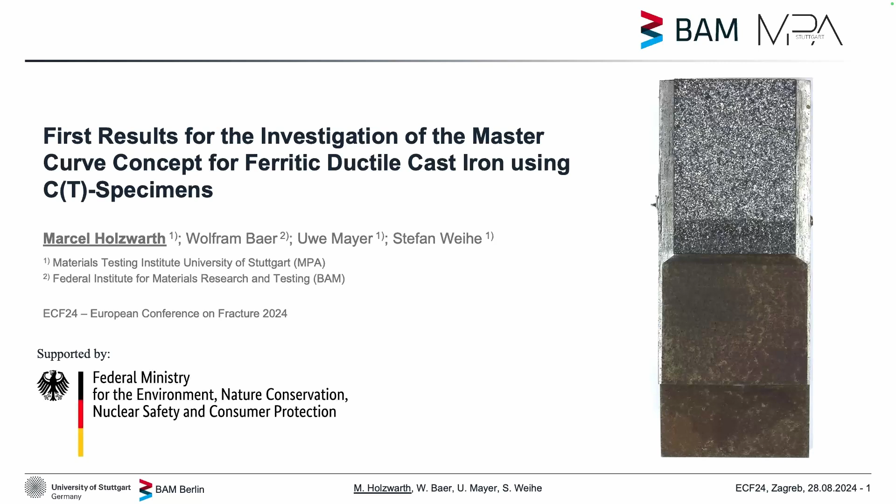Why are we doing all of this? If we check the regulations, for example, IAEA SSG-26, for their approval, we need a proof that no crack initiation at all happens above a specified temperature, for example, at -40 degrees C. And for nuclear transport and storage containers, this is at the moment done via high effort and very expensive drop tests. We see two examples here. And those are made from ductile cast iron.

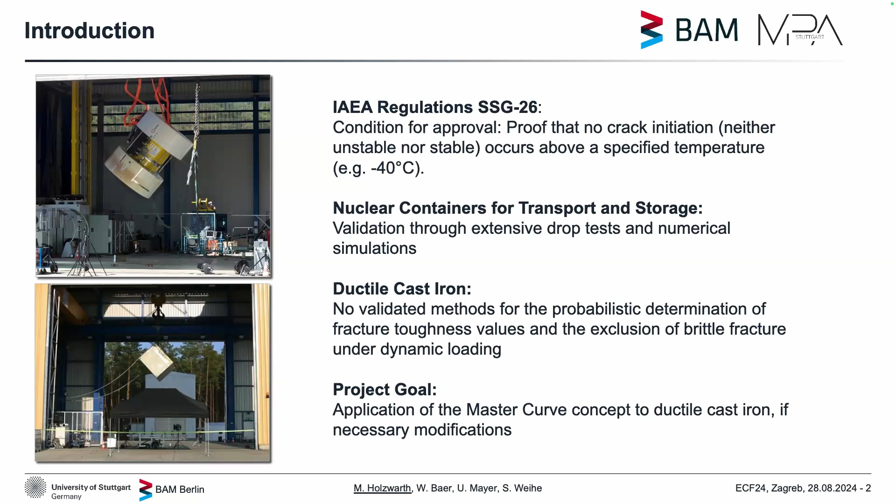And for ductile cast iron, we have the big problem that there is no real validated method to assess the fracture toughness values. And the goal of the project is now to establish such a method. This is now, thanks to the previous talk, a quick repetition to refresh the mind.

What's the master curve? Basically, we have to do a very small amount of tests. And with this small amount of tests, we can then do an evaluation of the reference temperature T0. And with this reference temperature, we get then this graph here. And the reference temperature T0 is here, the big bold line in the middle. And the master curve concept is then valid for the temperature of plus/minus 50 degrees around this reference temperature, which is then this area. It's currently already used for the safety assessment in the nuclear safety department for pressure vessels, for example, as supplement to the ASME reference concept.

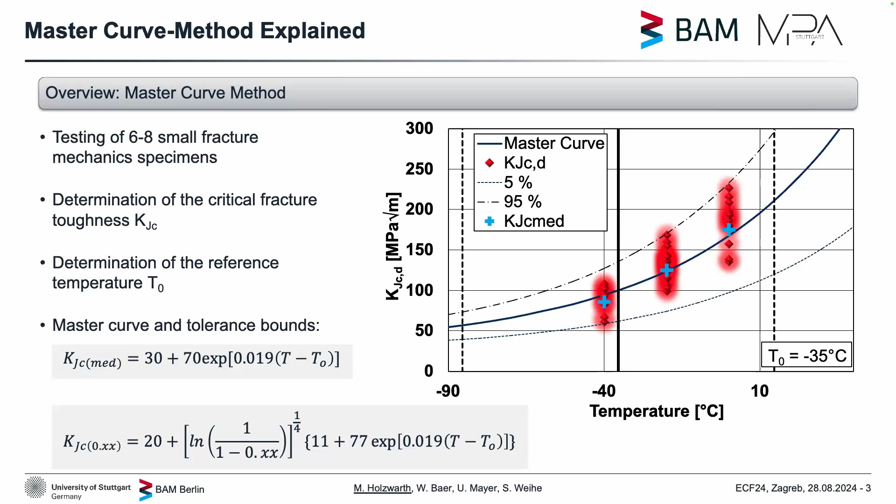And what's so good about it? Well, if we check it, for example, with the method in the ASME code, we only do 4 tests, but in the end, we only get a single value for the fracture toughness. And in the master curve, we only have to do 2 more tests, 6 in total. And we get this whole temperature range from -90 to +10 degrees, for example. So with just 2 more tests, we get a whole lot more to work with.

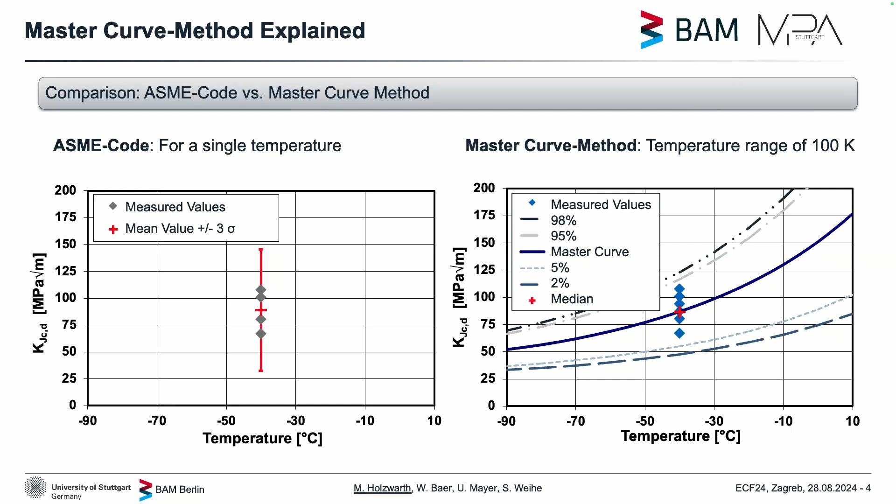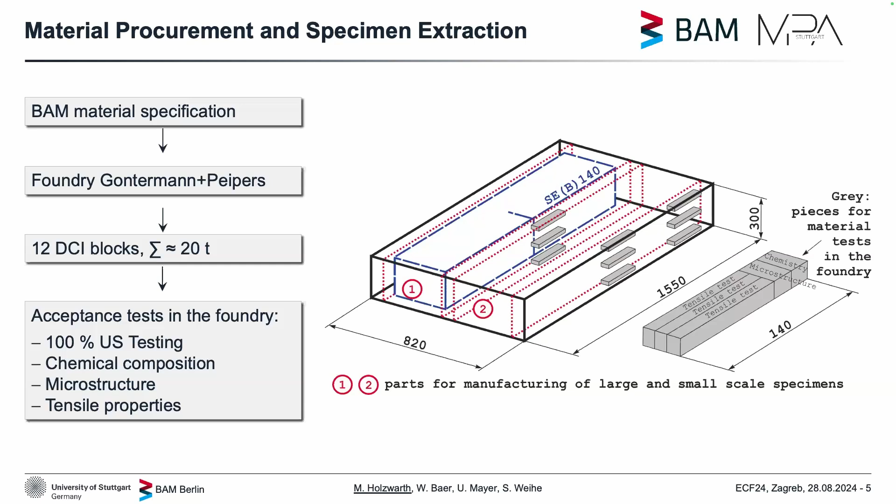For the project, we first need the material. We procured one. We had one specially made with a specification from our partner in Berlin. And we did 12 DCI blocks with a mass of around 20 tons. And we cut each into 2 parts, which are about the size of those big SEB 140 specimens we just saw in the previous talk. And further, after the testing of the SEB 140, we have extracted more specimens from those broken halves, mostly the smaller SEBs and CT specimens.

This slide we have all already seen. On our side at MPA Stuttgart, we are mainly doing the Pellini testing and the CT testing. The Pellini testing is already done. My colleague already mentioned it. We have performed the tests and determined a value for T NDT of -5 degrees, which is quite close to the -5.2 we got from the Charpy tests.

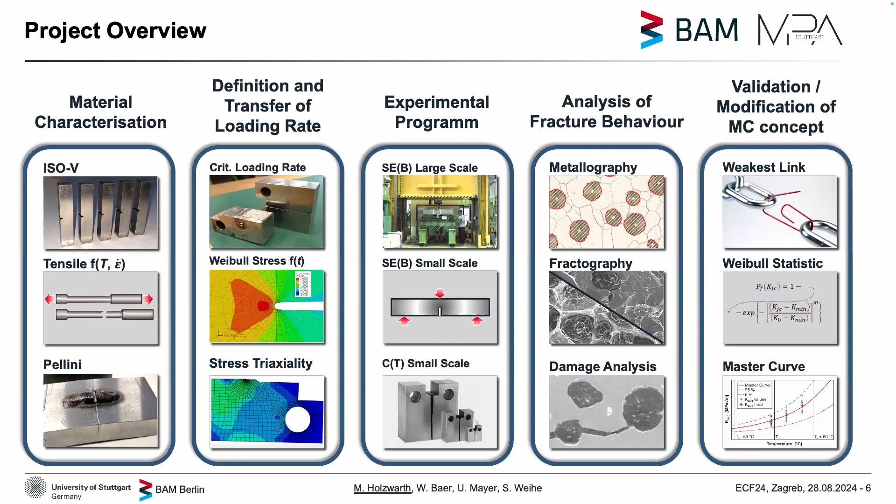Then we performed the CT testing. Currently, the CT25 testing is done. We used a machine which can go as fast as 10 meters per second and up to a load of 100 kilonewton. We used high-speed cameras at 100,000 FPS to measure the COD of the specimen. And for the force measurement, we used a piezo load cell for the slower tests, and for the faster tests, we used strain gauges.

We tested at 2 different loading rates. One of the loading rates was 5 times 10 to the power of 3, and the other one was 5 times 10 to the power of 4. I will from now on reference those as the slower and the faster loading rate.

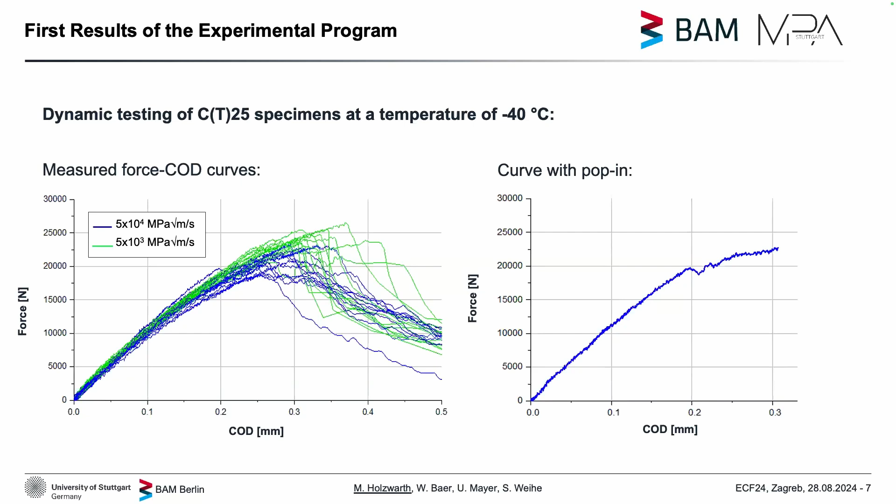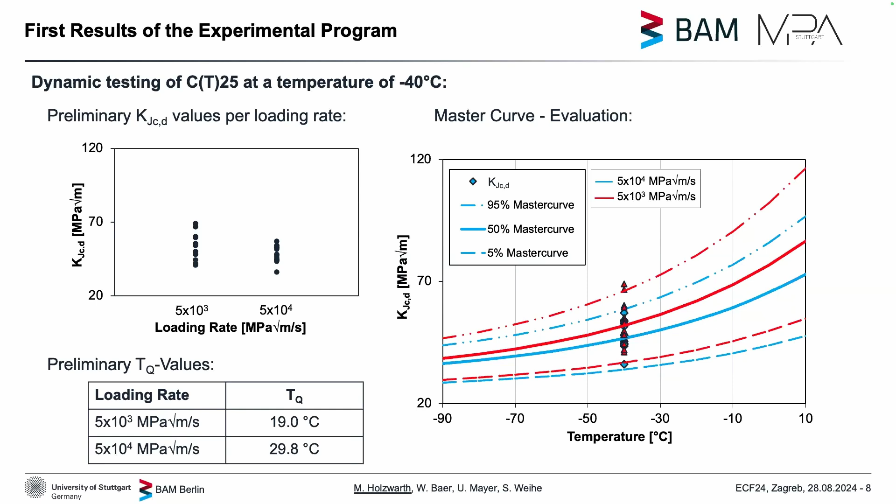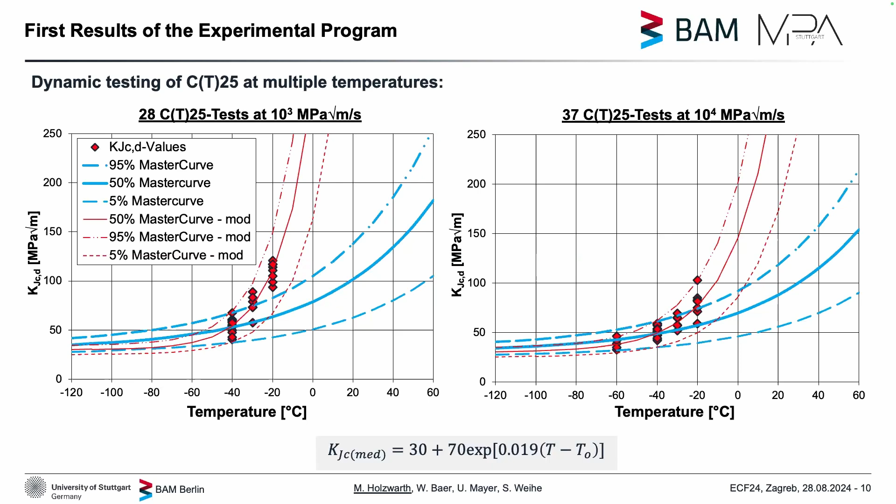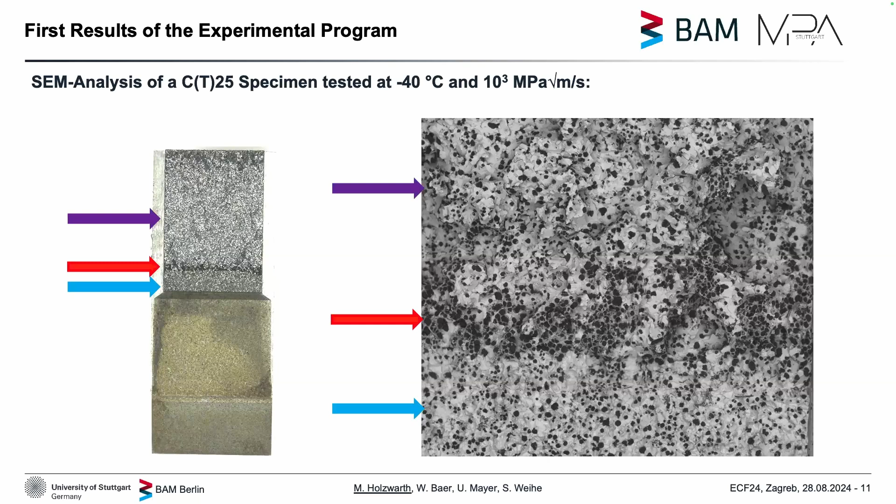So we did some SEM analysis because we spotted some black areas at those minus 40 degree specimens for the slower loading rate, which we can see here. The red arrow should be quite visible, those black spots. And under the SEM, we noticed that those black spots are just huge clusters of graphite particles. Our strain gauges for the crack detection also said we had a little bit of ductile crack propagation before the brittle crack initiated. So currently our theory is that we have here at the bottom the pre-cracking, then a little bit of ductile crack propagation, and then the brittle fracture.

And here at the brittle fracture, the crack just goes through the material, through the matrix, and just opens up those graphite particles which are in its way. While for the ductile fracture, the crack goes the path of lowest energy and goes from particle to particle, resulting in this very populated space because every single graphite particle is visible. That's the current theory. As I said, we are still working on more tests. With more tests, we can validate the stuff or change it.

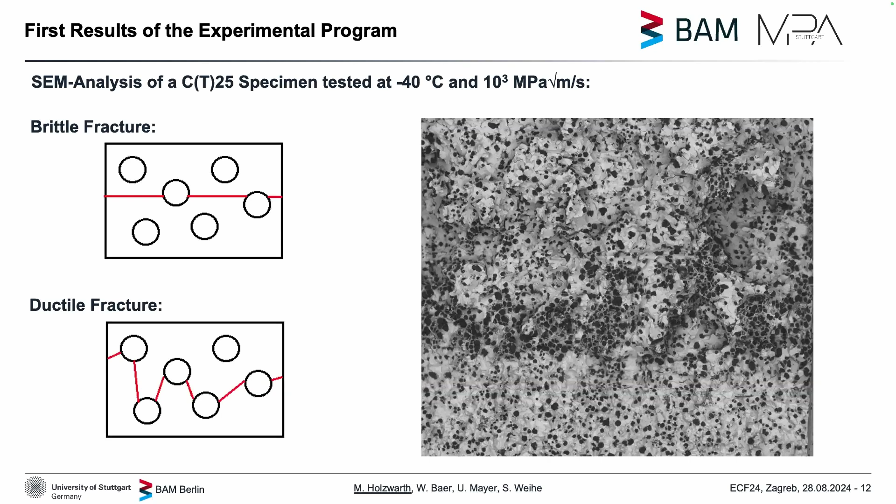Which brings me to my summary and the outlook. As I said, we want to establish a method with which we can assess the safety of ductile cast iron in the brittle to ductile transition range. And for that, we have performed first master curve analyses with a lot of tests. And now it's planned to do the CT50 and DCT9 test series with 40 specimens each. And currently for CT50, 20 of those are already performed. And we also plan to do finite element analysis of selected tests and further fractography and statistical analysis. And then we will see at the end if the master curve works for ductile cast iron or not.